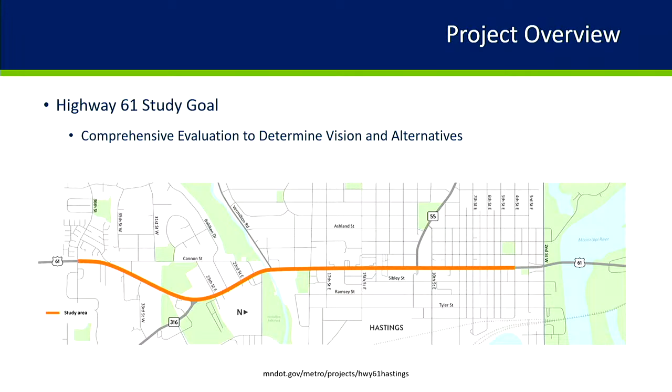So just a quick look at our project schedule right now. We're towards the end of this particular study, but we are at the beginning of the process, which is eventually going to lead to construction. We do have a construction project programmed. It's scheduled right now for 2027. That's where we will be coming in and looking at 61, redoing the pavement, making improvements. This study is at the front end of that, again, to help set that vision.

From here, I'll talk a little bit more about it later, but we will really go into looking more at what is the final scoping, what is the preliminary design, moving into design, and then ultimately construction. So again, end of the study, but really the front end of the overall process. All right, so I am going to hand it over to our consultant project manager, Tim Thoreen. He has been here before as well, you remember him from our previous discussions. He's going to go into some of these details here.

He'll do a quick refresher on our phase 1 and phase 2 of the project. Information you've seen before, information that's available on the website. And then in phase 3, that's when he's going to dive into those details.

We'll go through the four areas on the corridor, speak to each of them, hit some of the highlights, and really show how we've worked to improve the corridor, present that vision to get to safety, better mobility, but incorporate the work you've already done on the corridor. We can't forget that. And also listening to the businesses and the residents. We tried to incorporate all that information into what we're going to present here.

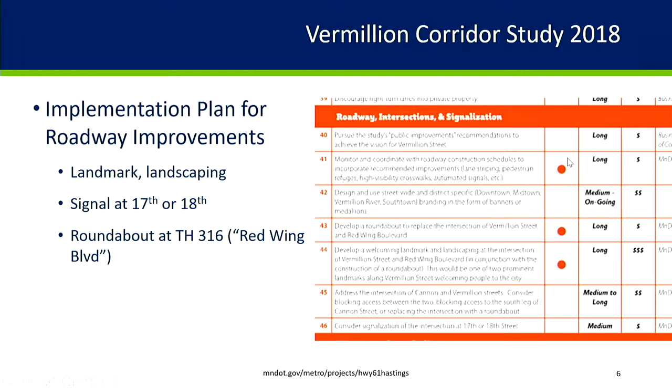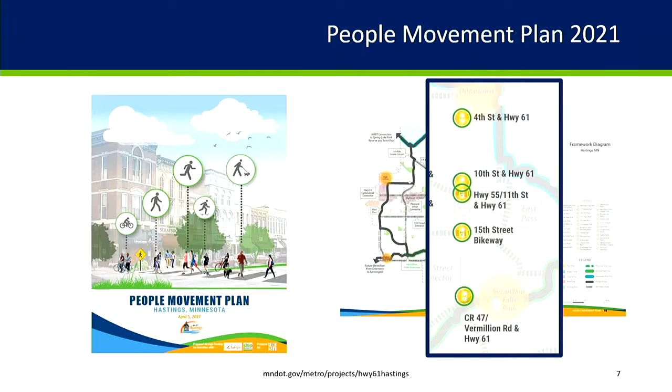And so you see some emerging intersections of interest in that People Movement Plan, where we look at 4th Street as a key intersection. 10th and 55 in particular really stood out as a priority for getting people across safely there. The 15th Street, there's discussion about a bikeway at that location. And then kind of getting down to that node around the Vermillion River at County Road 47, kind of become key intersections that I wanted to try to address in the longer term plan for the community.

So I'll play off that discussion about the people movement plan and preview some of the thinking that goes into developing a vision for a corridor like this, starting to think beyond just the immediate street. We hear a lot about complete streets and the need for multimodal functionality, but in reality we have to broaden our mindset to a more complete network.

What might that look like in the city of Hastings? You could imagine making sure we have east-west crossings enabled. I've highlighted Ramsey Street here in red, a potential north-south corridor that could be a good option for bike routing instead of having bikes go on Highway 61.

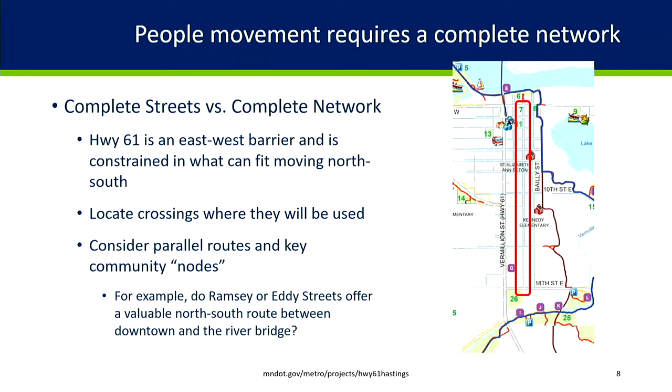That also has potential benefits with connectivity from key nodes. We talked about the Vermillion River area already as a key node in the community. Maybe Ramsey offers a convenient, safe route for pedestrians and bicyclists to get between downtown and Vermillion River. That's the mindset that comes into the discussion when we look at a vision for Highway 61.

Looking at some basics about why we're talking about this corridor: 31,000 vehicles per day come through, especially on the north end. Even at the Vermillion River it's still high at 27,000 vehicles per day. At 316 you see a major split, with two-thirds of traffic going onto 316 and about 7,000 vehicles heading south on 61 itself.

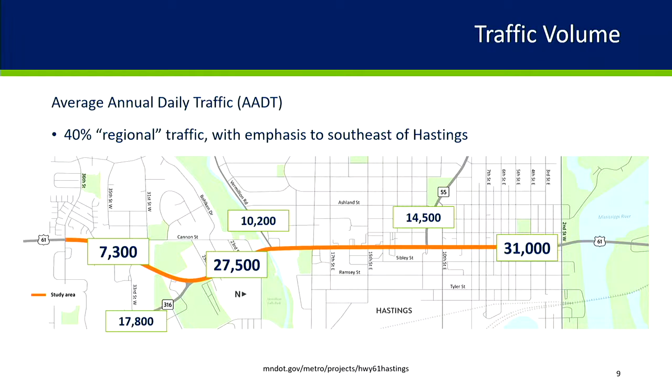So a lot of traffic comes through this corridor, much of it regionally oriented to points southeast and the Twin Cities, with a lot of freight coming through. That's what this graphic represents.

The blue line depicts traffic on the corridor over the course of a day. In the morning you see a peak on the left-hand side - that's the morning rush hour right at 7:30, a very intense peak that drops off suddenly. In the afternoon, you see a steady, gradual building of traffic volumes, a prolonged peak period through the Highway 61 corridor that tapers away into the evening.

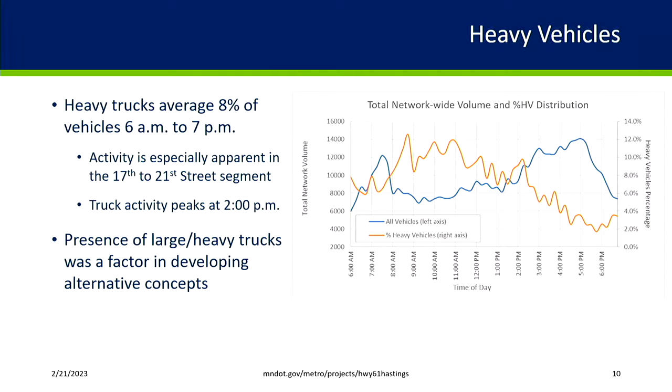Trucks recognize this, and that's what the orange line represents. They don't hit the corridor at 7:30 in the morning - they wait for all that traffic to push through, then you see a significant peak in trucks about 8:30, 9 o'clock, slowly going through the corridor and tapering off as the PM peak builds. So heavy vehicles are an important part of the corridor study - we want to make sure we're considering them in developing solutions.

That has an effect on what the typical cross-section might be. Is it a 12-foot lane, or do we go with an 11-foot lane? How do we provide for turning movements? That sort of thing.

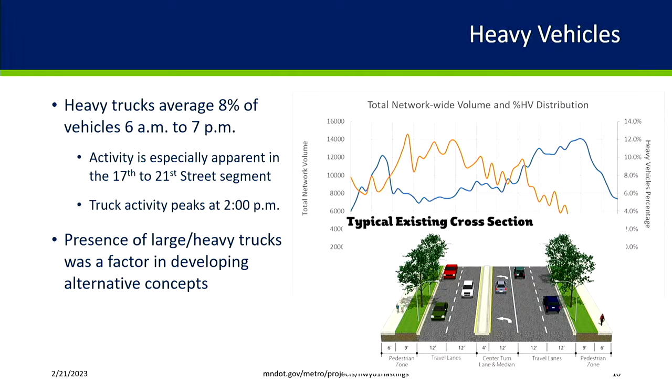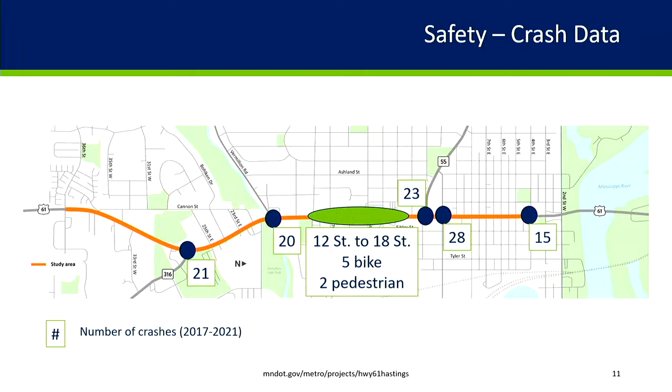One thing to note is that in the pedestrian and bike range, we see most accidents happening in the 12th to 18th Street corridor segment - I've got a graphic depicting where those occurred, with a lot of bike crashes between 12th and 18th Street. There are some other locations too, but that pricks up our ears about where we ought to be paying attention to pedestrian crossings. So from 18th and north, we want to be thinking about how to get people across the corridor.

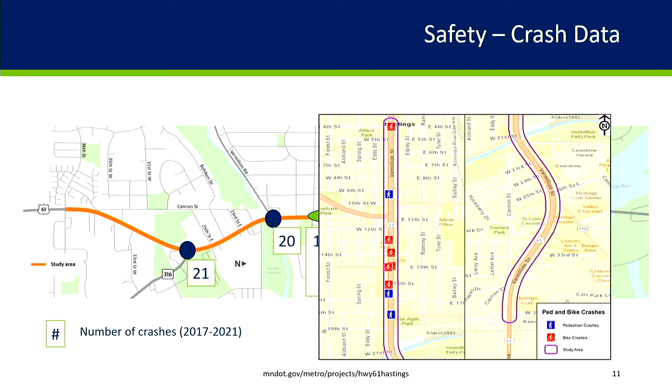What we see though is it's a very aggressive, fast corridor. People are willing to take risks to get onto the corridor, but once they get on, it moves okay.

In 2040, that's not the case. It starts to really break down, especially in the southbound direction during the PM afternoon peak, to the point where a trip from 4th Street to 36th Street would take almost 22 minutes on normal traffic flows in 2040. So we know that something needs to be done to address this issue.

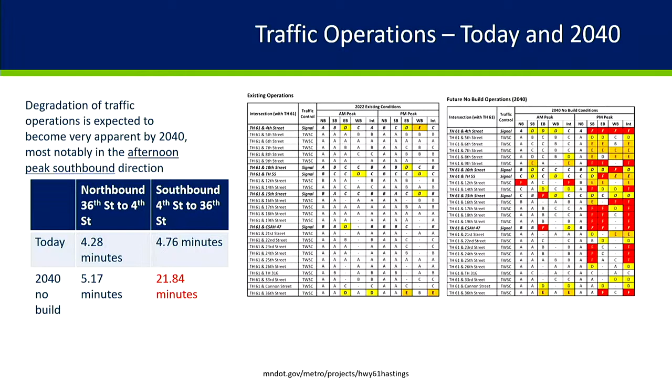That starts to lay some of the groundwork here. During phase 1, we also did public engagement. We had door knocking of businesses, a public meeting here on May 18th, participation in Rivertown Days, and an online comment map and survey tool.

These were some of the themes that came up through those discussions with the public: pedestrian crossing issues, very common themes through the area, people worried about operations at 46 and 47 and Mill, and how to provide sidewalk and trail accommodations through the corridor.

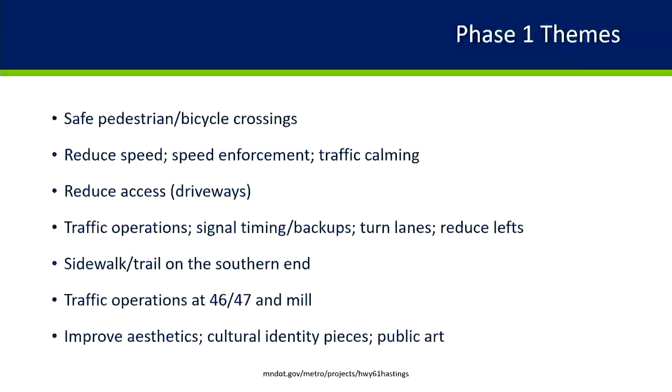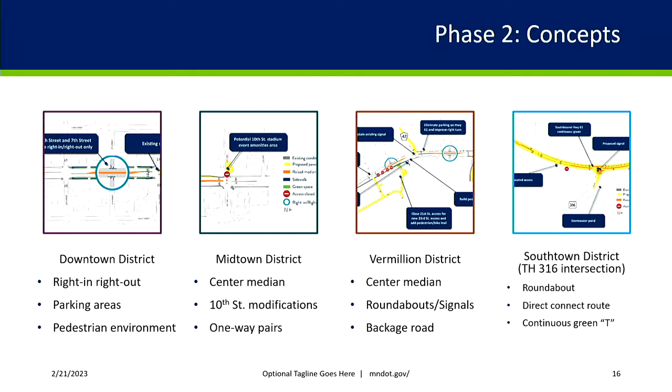So I've got a quick discussion of phase 2, which is where we get into brainstorming mode and creative analysis of opportunities and concepts. For each of the 4 districts, we constructed and analyzed a variety of concepts, and used public engagement to test those and get feedback on them.

Again, more of the same: door knocking on businesses, business association meetings, meeting at the Chamber of Commerce with the Downtown Business Association, a public meeting on August 24th in this building, and also an online survey.

Again, similar themes came through: safety for all users, being cognizant of business access, considering historic and community themes and features of the corridor so the community character isn't lost. There was also support from the public for roundabouts, particularly full-size roundabouts, with less interest in compact roundabouts.

Through that whole process, we developed a list of evaluation criteria that we applied to the concepts and alternatives. We had 4 major buckets of evaluation criteria around safety, community identity, traffic operations, and basic feasibility factors like cost, right-of-way requirements, and maintainability. We applied those criteria across the whole corridor.

That's my quick run through. I'll take a little breather here and offer the opportunity for anybody to ask questions about the first 2 phases of work, and then we'll dive into the basics of our recommendations.

All right, we'll jump into, like I said, we set up with the 4 districts. We'll start with the downtown area and walk through that segment of the corridor. Downtown in our parlance is roughly from 4th Street to 10th Street.

Here you can see, this is maybe a preview of what you would see with the public engagement tools, what would become available online, and what we'll show at the public open house next month, just calling out some of the features of our corridor. Happy to go into any one of these things, but for brevity's sake I'll step through the corridor as a whole, this is the 4th to 10th Street area.

Recognizing that this is a corridor story for 4th to 36, we also know there's a lot of concern about what happens when people are coming off the bridge and how that influences traffic behavior and driving behaviors in the Highway 61 corridor. So we didn't want to neglect that, and we do have some recommendations developing for what happens when you come into town from the north on Highway 61. Here you can see some of the emerging ideas.

It's maybe difficult to interpret, but on the right-hand side, those southbound lanes, we're imagining some kind of striping that would give a visual cue that you ought to be slowing down. The way that striping is layered onto the pavement provides a visual effect that encourages drivers to slow down. It's kind of an odd striping that's not typical to see, so it would encourage some slowing.

At the same time, we also know there's a lot of interest—we heard from the business community—in making sure we're directing people to the downtown businesses. Currently, I'd say they're dissatisfied with the level of signing available for directing motorists to the downtown area. So we're identifying maybe an opportunity to work with MnDOT to find an overhead sign that replaces the one that's kind of off to the side right now, something overhead and more prominent, really directing people off to the Main Street area from 61.

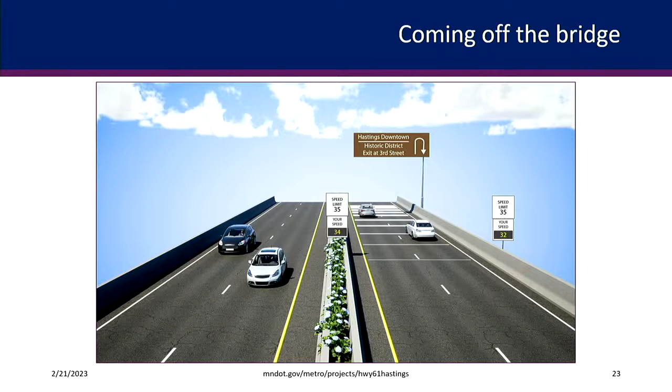Some of the other features we talked about are landscaping and landmarks, kind of community identity. In particular, this downtown area has a lot of rich symbology to work with. We've got the herringbone pattern you see on a lot of the sidewalks here. We want to see how we can continue that along Highway 61 and keep that theme running through the community.

Trying to find ways to get people oriented around where to go to downtown, we want to play off some of those themes that already exist for signing. There might be, as we talked about, medians—you'll see some examples of medians in the corridor. There might be an opportunity for some kind of banner-type displays, similar to what you see in this picture, to give people a sense that they're coming into the community and to embrace the Hastings area.

Before I get into the median discussions, also on the theme of visibility and safety—there is a fire station right there at 5th Street. We want to make sure we're cognizant of any improvements we make that don't negatively affect the fire station and emergency services in the corridor. We talked with them, and we're confident the solutions we're coming up with won't affect what they do. We did talk about the possibility of adding some warning signals to let motorists know an emergency vehicle is coming onto Highway 61, or operations that might warrant some notification.

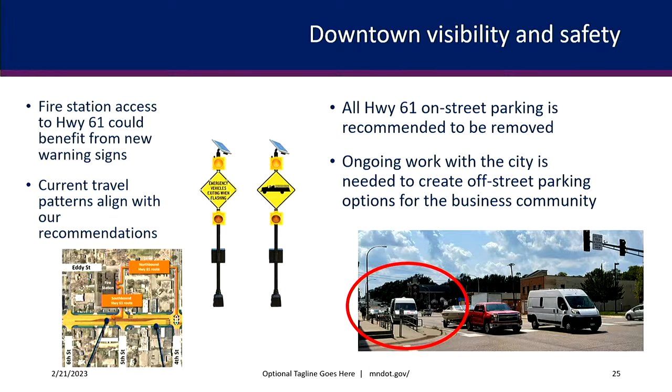We'll get to the median discussion here now. Let's see if I can go back.

When we looked at this, 5th Street here and 7th Street here, we're introducing the idea of a median that makes those intersections right-in, right-out only for vehicles. I'll explain what that looks like in practice through this discussion.

This is a representation of the current roadway geometry at 7th Street and 5th Street. It's about a 75-foot crossing for anybody to go from curb to curb across Highway 61. I can take 25 steps, just walking by my house, walking in hallways. I count 25 steps, and that's an uncomfortably long time to imagine walking across 4 or 5 lanes of traffic. It's just not a very desirable experience for pedestrians.

So we wanted to figure out ways we can make that a safe experience for pedestrians, and we looked at those intersections, in particular 7th and 5th Street. These are existing traffic counts. In the morning and PM peak, there are 0 cars crossing across 7th Street going from the east side of 61 across to the west. In the morning, there's 17 cars making a left turn from southbound 61 onto 7th Street. The point is that there's relatively small numbers of cars versus the larger 1,300 cars coming through the overall corridor.

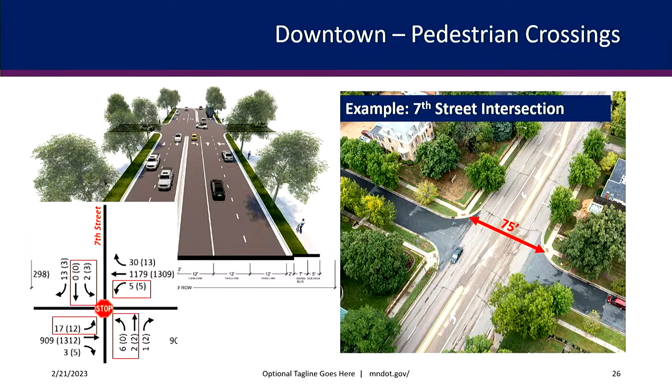So we felt comfortable with the possibility of closing that median and making that right-in, right-out, so cars can only turn right off of 61 and right onto 61, providing that space for pedestrians as a refuge as they try to cross Highway 61. That cuts that distance from 75 feet to less than 30 feet, a two-stage crossing of Highway 61.

Besides the benefit to pedestrians, it offers some traffic calming measures. We'd expect speeds to slow down as you come through the corridor. A more constrained environment signals to drivers that they need to slow down, and there are opportunities for aesthetics. We showed the imagery of the banners through there, and you could imagine something like that coming through here. There's a lot of controversy about whether plants could actually survive, and that's debatable. So we recognize this might not be exactly how it would look, but we're trying to imagine what the corridor could look like through this area.

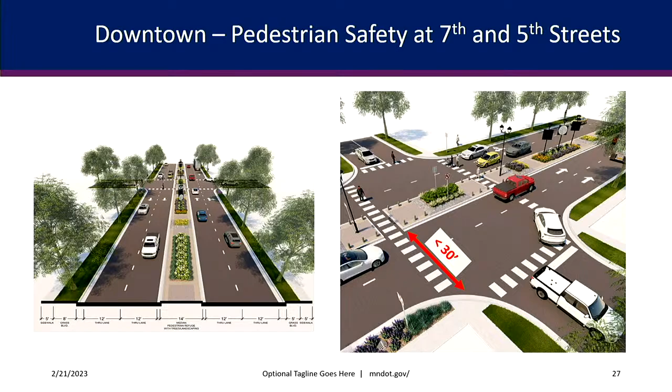So that's my quick run-through of the downtown area. I'll just stop and offer, if I maybe skipped over anything, if you have questions about the downtown area, you can address those.

I'll back up just to one item, which Tim hinted at with the volumes. When we looked at them, there's not many people taking those moves where that median would be. We're already seeing people, they're not doing it today. We're just recognizing what is already going on with the driver - they're coming up and saying, I shouldn't go to 5th, I should go to 4th and go to the light. This just reinforces what people are already doing, and makes a safer environment for pedestrians.

So just wanted to add on a little bit to what you were saying. No, that's great, Brian, thank you.

To piggyback on that a little bit more - one of the key stakeholders using the corridor, the fire station, does just that very same thing. If the fire station wants to go southbound on Highway 61, they'll use the 5th Street access and go south on Highway 61 at 5th Street. If they want to go north on Highway 61, they whip around on Eddy Street, go to 4th Street, and take a left at the signal.

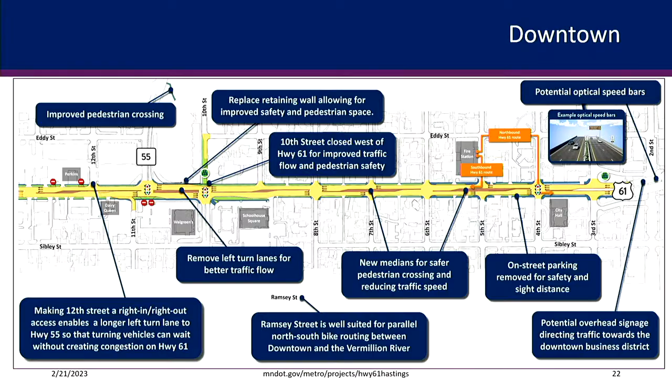And that's not just the fire station - that's common practice through the whole community. People in Hastings know how to navigate these streets. We've seen it time and time again. That's a good point. Thanks, Brian, for recognizing that.

All right, so we'll go to the Midtown area. We're roughly looking from 10th Street to about 17th Street. As I talked about, one of the key issues in this segment is pedestrian crossing and safety through there - there are a lot of concerns about that. There's also a lot of business access, multiple accesses to businesses, and a lot of concerns about density of access and how that contributes to safety issues for motorists. And we don't want to neglect the 10th Street and Highway 55 intersection as a really key node in the overall corridor and how the overall corridor operates from a traffic perspective.

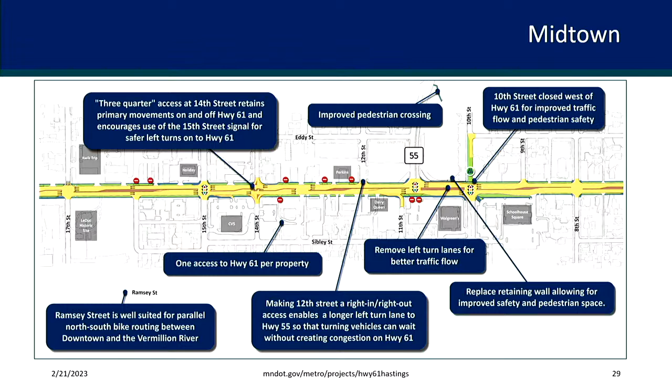So those are some of the key elements that we were looking at in the study. Specific to the Midtown area, there are a couple different things happening here. There are those two signals that are closely spaced together.

We looked at multiple options for how to deal with that signal spacing, including combining them into one location. Through that study, we landed on a place where we think it's still valuable to have the two separate signals. We got a lot of questions from the community, a lot of skepticism about the signal phasing.

People can drive through there and see, well, this is not working quite right. The challenge is there's lots of turning movements that need to be accommodated within maybe a 2-minute window. You've got left turns happening from southbound 61 into the Walgreens parking lot, a left turn from northbound 61 into 10th Street, and turns happening between 10th and 55. Those signals are trying to accommodate a lot of different movements.

So we really focus on how we can simplify those movements and simplify that signal timing and phasing, so that we can dedicate more time to the key movements through the corridor. One of the things we led off with almost immediately was looking at those left turns, for instance, from southbound 61 into Walgreens.

You can see here we've got this kind of brownish bar through there in the middle of the corridor representing closure of those left turn lanes. So that immediately gives more time, allocates more time to the key movements through the signals.

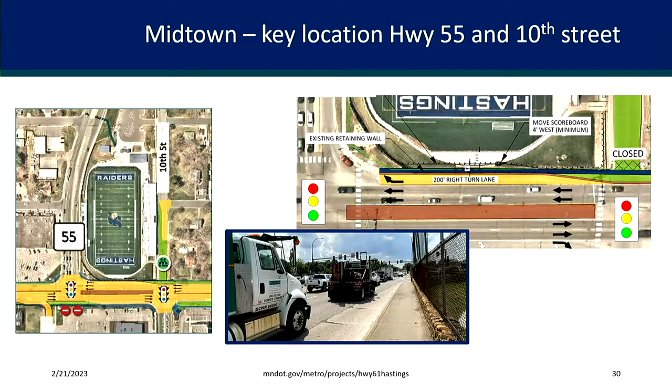I can add one other thing on that. We have had conversations with the school district about 10th, and one of the things we recognized from them is that they're already closing it for their events. They do let school buses through, but it's generally closed off.

So again, I'm almost repeating that we're following through on what's already being done. These actions have already been taken because they recognize it's a benefit to what's going on there. So there may be some refinement of this. We have to continue those conversations with the school district. They're encouraged by what we're doing, but they also recognize what does that mean for the buses.

Do we try to find a way to keep them through, or do we recognize a different route? There's some refinement there, but overall we're looking at whether we can prevent general traffic from going through here. Open up, as Tim said, that signal timing to recognize the main movements and then really make that an engaging area. So just wanted to offer that as well.

Thanks. I've got a question. Councilmember Pemble, do you have any numbers on what the traffic level is at 10th Street?

You showed the 7th Street numbers, and you didn't show the 5th Street ones, but what do you have for 10th Street? I don't have those numbers immediately available to me right now. We can make them available, and they'll certainly be at the public open house.

I think the heaviest peak period movement onto the west leg of 10th Street is a double-digit number. So we're not talking hundreds of vehicles, and we're not talking 10. It's in that range, so it does get used. Talking about the community understanding how the local system works, that's an obvious location where local residents know that's a good alternative to getting to and from 55 and some local circulation needs. So it does get used, definitely, but I'd just like to see those numbers. Yeah, absolutely, we can make those available.

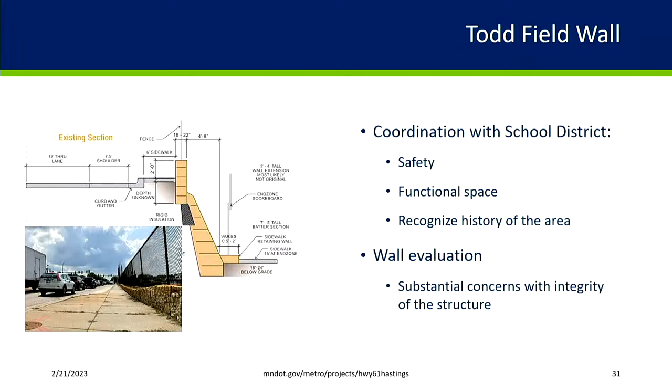So you can see here just a rough depiction of what that kind of repair might look like. Currently the wall is kind of battered, kind of angled, and we're imagining more of a vertical wall. The benefit is that we don't imagine impacting too much into the field space of the high school. It's really just straightening an angled wall to vertical, and you're getting a lot of space on the highway side for sidewalks and for a right turn lane. There are other safety features.

We've talked with the police chief about adding more event safety here, maybe adding bollards to the area where you'd have more of a physical barrier that would prevent vehicles from colliding into the wall and maybe even going into the field space. So we recognize that's an area of concern as well.

All things like that become available when we start doing things like closing the 10th Street corridor. We rebuild the wall, and you can create a really much better, safer, more inviting pedestrian space in that area.

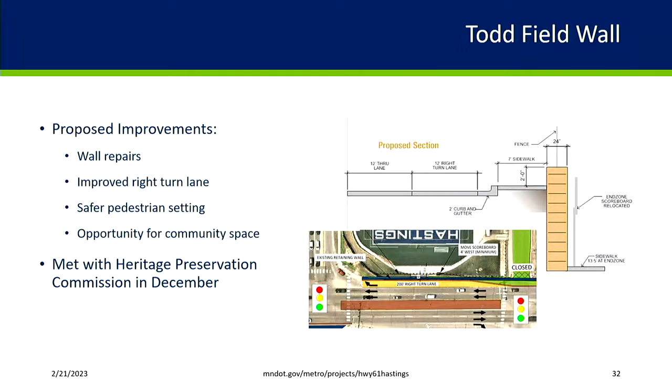I have a visualization of what it looks like with the signal timing here. I'm just going to run it briefly, just as a little proof of what we go through when it comes to studies like this.

Go back to the presentation now.

You talk about the timing, so would the 55 intersection become like a primary, and the 10th Street one would be like a slave?

I think they're much more, and I'm not a professional traffic engineer, Brian's more dedicated, but I'd say they're more integrated with signals. I wouldn't call one primary or the other. They really operate together, and they feed off of each other in how green time is allocated between the different movements.

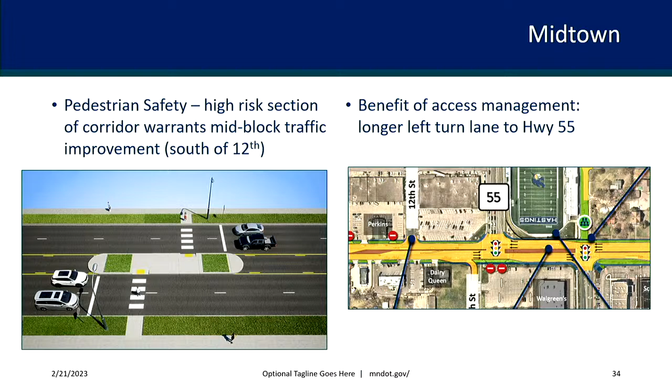We've all studied and analyzed it. I wanted to make sure folks recognize not only the Z crossing, which is a new, unique, intense enhancement for our city, but also the dual lane, a very concerning crossing movement given the barrier that 61 is for pedestrians. The lighting, the Z crossing, pulling that stop bar back to clear sight distance, all these things are very purposeful to maximize the safety of crossings before we implement them. I want to let folks know those are the things we're talking about at a conceptual level.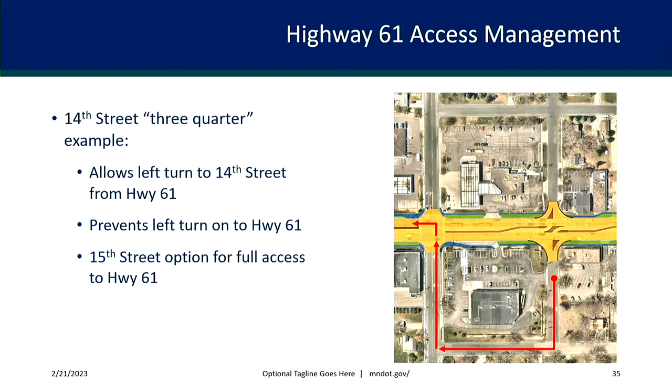In general, corridor-wide themes we've talked about include parking, and we're eliminating on-street parking on Highway 61. Another theme is important when it comes to funding and trying to get funding at the federal level, how we demonstrate the metrics we're trying to achieve that provide signals to our federal counterparts to fund corridors like this.

One theme we want to represent is access and how we're managing access for safety in the corridor. We really want to try to keep access to no more than one per site for future developments, and encourage as much as possible combined driveways on adjacent properties where possible, so you can dual-use a driveway access apron onto and off of Highway 61. That theme runs through the whole corridor, and it's representative of what we see in this stretch between 12th and 15th in particular.

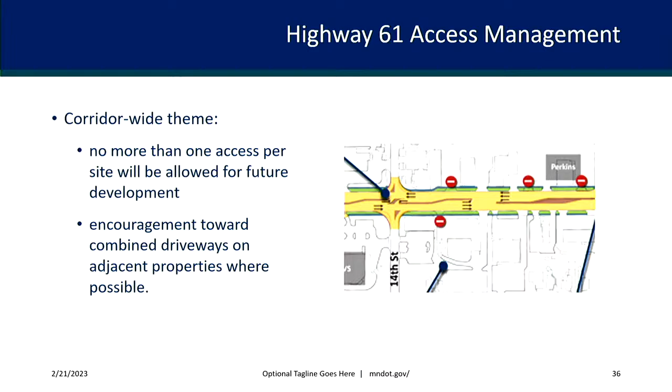All right, so we'll continue on down south to the Vermillion District. We're starting to look at the 18th area, roughly down to about 25th Street, from Ardent Mills south across the river and towards the 316 intersection.

Some key features there: 18th Street is currently unsignalized. We're talking about a signal at 18th Street and a realignment of that roadway. 47 gets some treatments there. The improvements anticipated at the 21st and 23rd Street area are consistent with what's already in the city's comprehensive plan. We played off of that plan to come up with recommendations for that location.

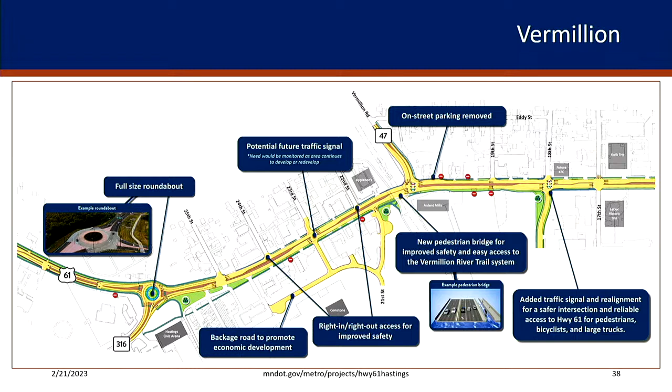One of the things that gets me really excited about the opportunity in this corridor is at 18th and the river. We're talking about realigning 18th Street so you've got a more proper intersection there. It's a very wide expanse of pavement right now, you really feel it, and it's a difficult area to cross. Realigning 18th so it gets a more proper intersection will tighten up some of those corners and make it a safer location to get on and off of 61.

Doing it also creates an opportunity for placemaking. You can imagine this currently where it's pavement right now—there's an opportunity for some artwork or some kind of community identity piece there.

What I really like is that you have the opportunity from 18th all the way down to 21st across the river, with the access closures we're proposing at Ardent Mills, to create a really great pedestrian bike environment. It's free-flowing space for a bike or pedestrian to move from this node at 18th, where you've got placemaking opportunities, all the way down across the river. We're recommending a pedestrian bridge across the Vermillion River to 21st Street, where again you have another opportunity for placemaking, kind of artwork, kind of community identity piece. It's really a neat change in the fabric of the Highway 61 corridor.

Speaking to the Vermillion Street or County Road 47 intersection in particular, there's currently a kind of wonky little bump out for on-street parking that people are confused by—they don't know if it's a right turn lane or not. We're eliminating that bump out and making it a right turn lane. In doing that, we also recognize there's a need to realign this County Road 47 intersection. It comes in kind of awkward, there's some unsafe sight lines, and there's not really enough capacity to handle all the traffic that needs to flow through there.

We did look at a roundabout here as part of our early concepts, but it just doesn't work at this location. We know there's interest in developing the site just to the northwest. So what we're recommending is a slight expansion of the turn lanes from one to two left turn lanes, and a dedicated right turn lane even longer than what's out there today. That requires a slight realignment, a little bit of a curve in County Road 47, to make it all fit.

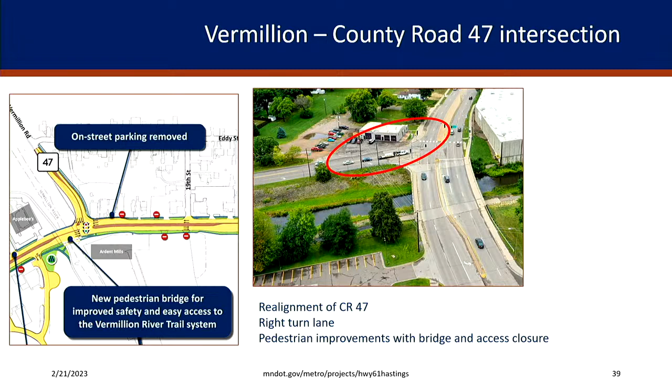And again, here's the pedestrian bridge concept there.

Going down, consistent with the comprehensive plan, in the 21st, 23rd area, we recognize there's a need to clean up some access and turning movements through this segment of the corridor. There's a lot of talk about aggressive morning rush hour, and this is where I really see it happening, in this stretch between 316 and County Road 47. I really feel that aggressive driver behavior; people are really moving through there. So these improvements we're recommending, introducing a median, identifying the potential for a signal at 23rd Street, and some right-in, right-out movements, help clean up the access and limit turning movements, creating a safer environment through this corridor. That should also help promote slower speeds through the corridor, especially with the signal.

This backage road idea, where we have 23rd coming off from a signal, provides the opportunity for some different economic development through this area, accessibility to these parcels from the backside. Not only does it get access off of Highway 61, but it provides a more comfortable access route for locals to get to businesses through here potentially in the future.

But we did talk with Cemstone about businesses and their operations, and they were comfortable with the way we were representing this. Their key movement of concern, which was frankly instrumental in us looking at this 21st Street, we'd show this as a right-in, right-out. There is a possibility we just close that off, and from a pedestrian perspective it'd be nice because you'd have one fewer crossing to worry about. Right now we're depicting this as having a right-in, right-out option, to help provide those truck movements to get to northbound Highway 61 and out of the corridor.

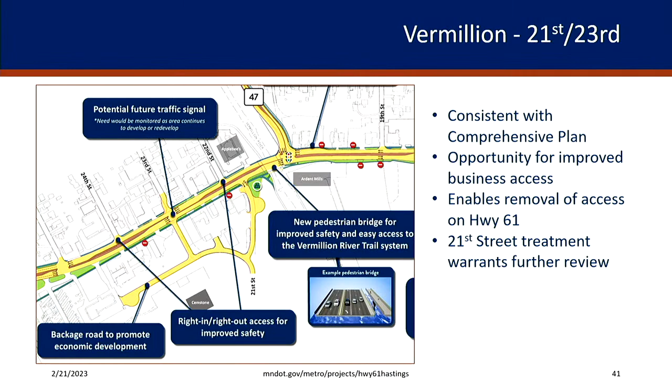That's a quick little run through. Let's see if there's anything else I missed there.

Question, Councilmember Fulch: for 23rd Street, the problem with this whole area is that it's super difficult to make a left-hand turn during heavy volumes. So why do you say potential future traffic signal when it's already really necessary at this point for there to be a safe mechanism to get across the street? Because what's happening is if people need to take a left, like if they're at Applebee's or those places, they have to take a right and go up to where you're going to put the roundabout for Highway 316, do a turnaround there to be able to go north. So what's the holdup? Why wouldn't you do something with that immediately?

No, it's a fair question. I think you could. It's about the traffic volumes at any one of those streets, 22nd, 23rd, 24th, and Brian talked about reallocating traffic when we do the modeling, and this will certainly have that effect of reallocating traffic to 23rd. So we anticipate volumes there to be enough that you could imagine a signal being a viable option there. When we do the traffic modeling and look at it from a modeling perspective, we don't see issues; without a signal there, it operates fine, and it's something we want to monitor. Part of our recommendations will be to continue monitoring that location for a future signal. There are probably benefits to putting the signal right away, but in terms of priority of improvements in the corridor, we don't see that as an immediate need.

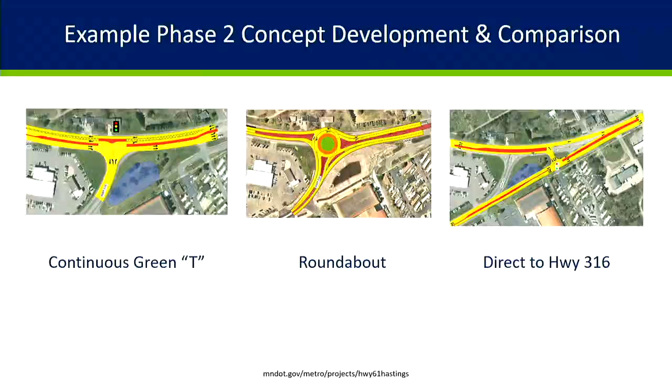Here's an example image of what that roundabout would look like - not exactly like this, but not too far off. We are talking about a full-size roundabout, not a compact roundabout. There's a proper median circle in there, with 2 full lanes navigating the major movement - that being from southbound all the way into 61 to 316.

So we're accommodating that. One of the concerns we had was actually 2 concerns. You've got 2 lanes of traffic coming from southbound 61, wrapping around, and then you've got to get them into 316 where it merges down to 1 lane. Is there enough space to do that? We're confident that there is - we believe you can get traffic down to 1 lane before the next roundabout that occurs on 316.

The other concern with the roundabout, that I was a little skeptical about to be honest, was the northbound traffic. We've got 7,000 vehicles a day on Highway 61 to the south. What happens to those vehicles trying to enter the roundabout when you've got this major movement coming through from southbound onto 316? Our modeling does indicate there will be some stacking and queuing, but it does flow through there and operates fine - you don't see major issues with stacking and queuing up of vehicles on that northbound through movement.

We want to be cognizant of pedestrian mobility through there, so we are showing - and this is a theme through the whole southern part of the corridor - trails on both sides of Highway 61, providing that option for pedestrians and bicyclists to get through the corridor.

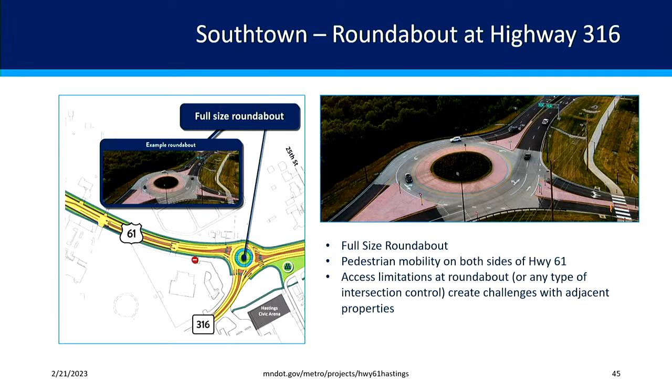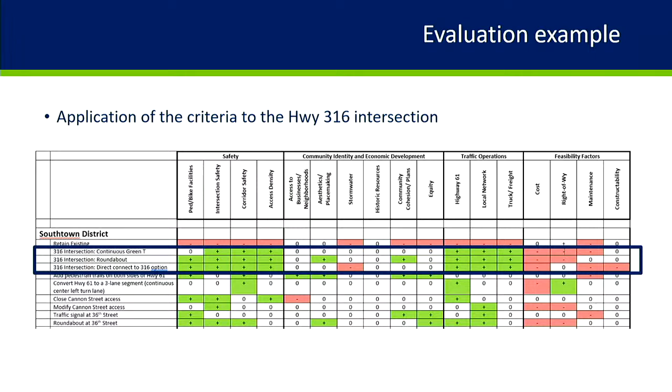And an example of how we evaluate, so I talked about the criteria. This is way too detailed, don't try to read the details here, but at a qualitative level, we look at the criteria and the pros and cons of each against those intersection options. Through that analysis, we determined that the roundabout is the most appropriate option.

I do have a video of that, but I think I'll skip it in the interest of time. We can see a video demonstration of how traffic would move through the 316 intersection with the roundabout. What you'll see is some queuing issues, some concerns about how northbound vehicles get through there, but they generally cycle through at an acceptable rate.

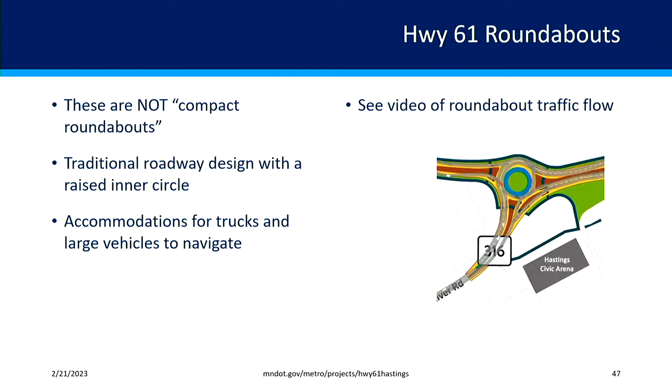Looking at that stretch between 316 and 36th Street, we're trying to figure out if there's enough right-of-way to allow for basically the existing cross-section with 3 lanes and the medians, and whether we can get trails on both sides. We're confident that you can do that, so we're essentially not changing the dynamic of the existing medians and access provided. We're not making dramatic changes to the access in this stretch of the corridor. The big thing changing here is we're adding trails on both sides of Highway 61, and we're closing this access at Cannon Street.

In part, this is because what we're recommending is a roundabout at 36th Street, and that becomes a more desirable location to have vehicles safely getting onto and off of Highway 61. It's a reasonable reroute to get to points at Cannon Street from 61 through that roundabout. We recognize there would be interest on the pedestrian side of things, so we're showing a little stub there where pedestrians would be able to make a connection to the trail system from Cannon Street. But in general, we see that as an opportunity maybe to clean up some of the access.

I talked about funding and the desire to show safety improvements. This would be an example of how that would help to elevate the corridor in its competitiveness for future funding.

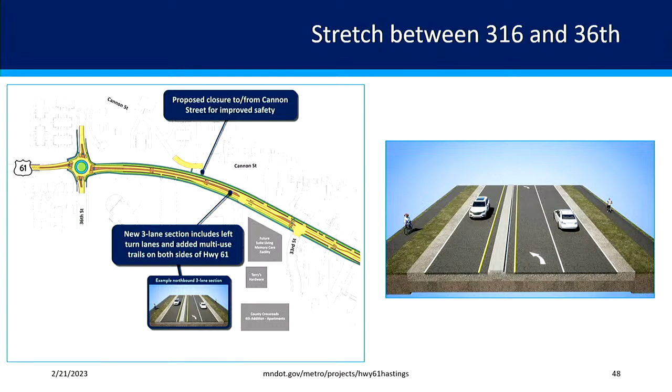Then there was discussion about the 36th Street location. A lot of interest from the community about this in particular, pedestrians are concerned about safety crossing here. We looked at that and said, yeah, I can understand why there'd be concerns about safety there. It also serves as sort of a southern gateway to the community, and adding the roundabout there offers an opportunity to signal motorists as they're coming in: hey, I'm coming into a new area, a different space, I need to drive differently. So the roundabout helps to promote that idea that you're coming into a new space, a different environment, and I need to be more aware of my driving behaviors. So we see some value there with the 36th Street roundabout idea as well.

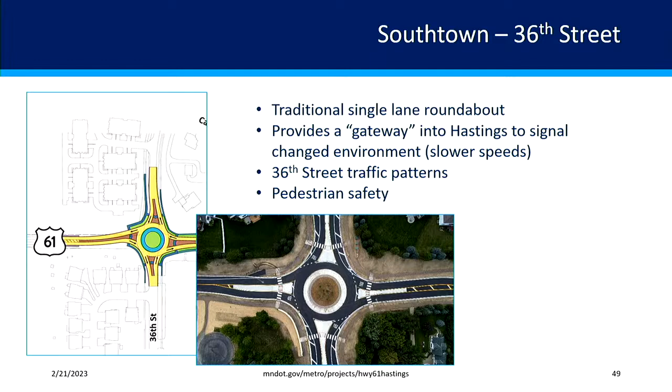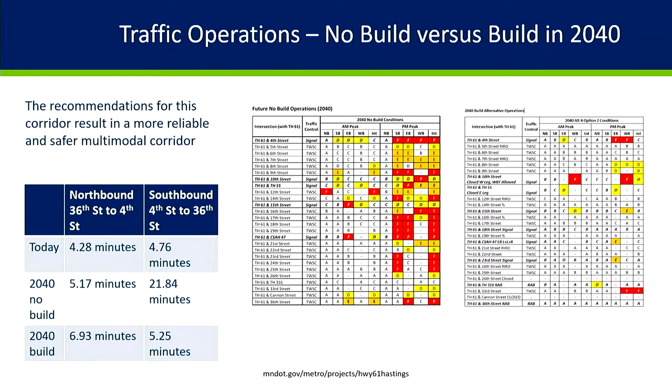Going back to that idea of traffic operations in the 2040 timeframe, on the left is what happens if we do nothing, and then for 2040, here's how the corridor models out with the proposed improvements. From a timeframe perspective, we're seeing what's currently a 4 to 5 minute drive becoming, in 2040 even with the improvements, a 5 to 7 minute drive potentially, but a much more reliable and safer 5 to 7 minutes than today, and it's not 22 minutes long, which is what it would be if we were to do nothing.

And we don't want to neglect the idea of technology. We're firmly in the 21st century, and we're going to see more and more 5G connected vehicle and broadband issues coming up. How can we make sure the corridor is armed with the functionality it needs to adapt to that change in technology? We don't want to neglect that in our recommendations. It doesn't make its way in terms of physical changes you'd see above ground, but it might be more below-ground types of changes. But it's certainly important that we think about this as we look at funding for the corridor.

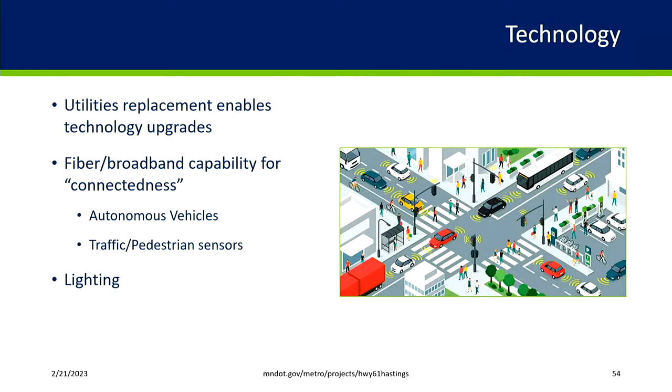And then from a cost and funding perspective, I talked about funding applications. I'll turn this over - thanks, Brian, for jumping in - and I'll let Brian take over. We've just got a couple more slides left, and then we'll wrap it up and open up to questions. Go ahead, Brian. Thanks, Tim.

So we've taken our first cut at looking at the cost - if we implement everything, what are we looking at here? With the roadway and related items, we put that cost at 15 to 17 million. That's today's dollars with contingency built in. Obviously there's some inflation before we get to the construction year, but that's approximately what we're looking at. We know the city is looking at redoing their utilities in the corridor at the same time - that's another 3 to 5 million on top of it. And beyond that, what we didn't calculate in would be some of the placemaking opportunities - if you wanted to add more art, or different landscaping ideas - that would also be on top of it.

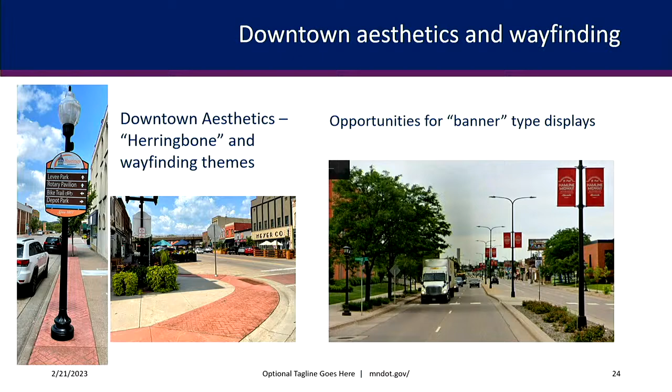And pulling that up—more than just the banners. For instance, imagine Robert Street, or Highway 61 going through Red Wing, where they chose more of a historic nature lighting feature and procured a lot of those lights themselves for installation, but it was in conjunction with the Highway 61 renovation project as it was going on. That's what I had always hoped for in doing this, so it would really highlight our downtown more.

No, thanks for bringing that up, you pointed out a great example. We obviously do this in other areas, so absolutely, I think that's a great element to pull forward. Okay, so how do we tie something into that, into this whole process?

I tell Tim to put it in the report. Oh, okay, all right, fair enough, thank you. Fair enough, right? Again, thank you and safe travels on the way home. All right, thank you very much for your time.